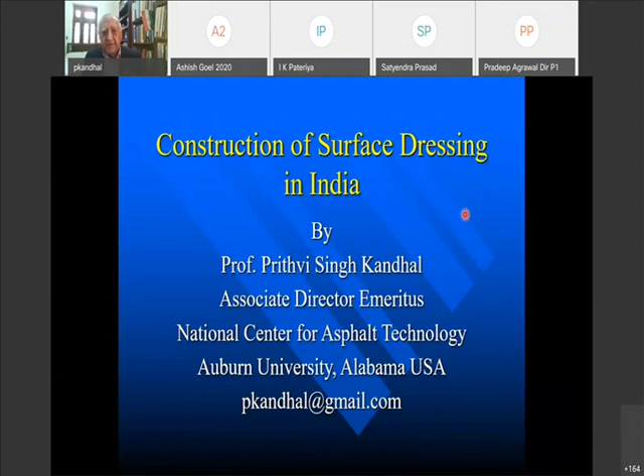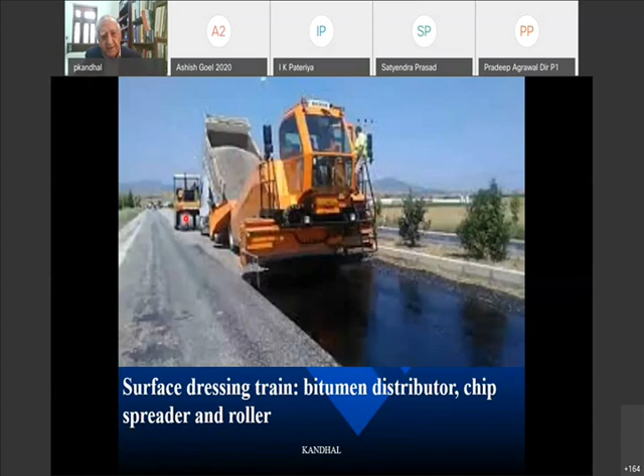Construction of surface dressing in India. I'll just give you some nuts and bolts of that. And here we have, again, a train. Bitumen is being spread, stone chips are being spread, and there's a roller behind it. So it's like a train which goes very fast.

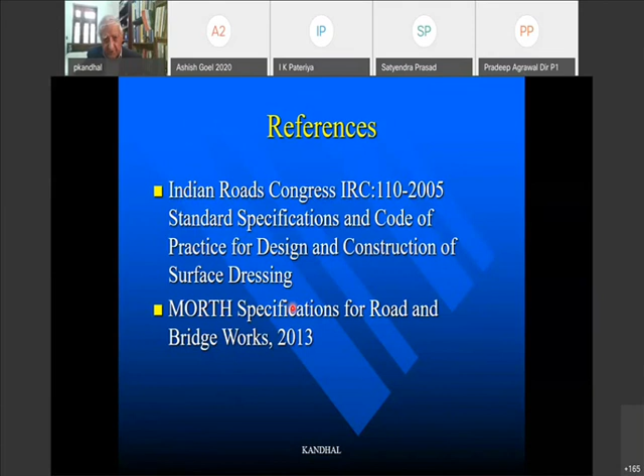So as I mentioned before, the Indian Roads Congress has the code IRC 110, adopted in 2005, I think revised in 2005, Code of Practice for Design and Construction of Surface Dressing. It's a very excellent code, which an average civil engineer can understand. Then we also have the Ministry of Road Transport specification on surface dressing in the book year 2013. So I'll just take you through how we use the mechanized surface dressing. And I should mention at this point in time that all my slides don't have any copyright.

I'll send you a copy of all the slides I'm showing to you. Feel free to use them. That's the way we can spread the word. That's the way we can train people in that.

So let's talk about the materials first. I'll talk about the binder and then the aggregate. So the binder types, we have two types. We can use paving bitumen VG10, viscosity VG10, which is equivalent to our old 80 by 100. Or we can use a rapid setting cationic emulsion. I would prefer that because it's a cold technology. So I think we should use more of this one, although both are allowed in our specification.

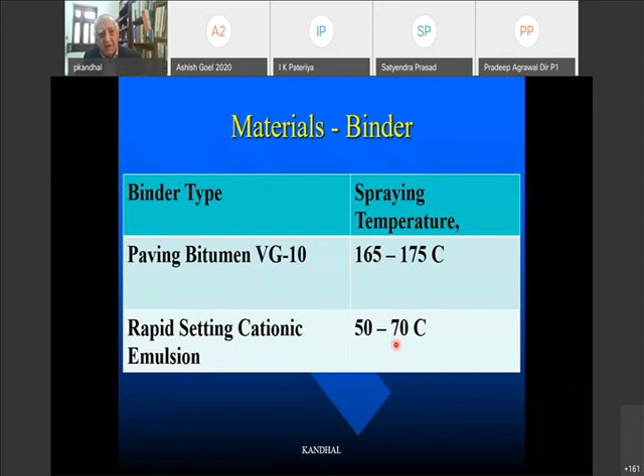And here are the spraying temperatures. For paving bitumen, we have to heat it to this high temperature. Whereas for emulsion, we have to just warm it to 50 to 70 degrees Celsius. So here is the binder, and now here we have the aggregate.

These are the two most commonly used sizes. We have 13 millimeter and 10 millimeter. There are 19 millimeter and 6 millimeter as well in our standard. But I'm discussing only these two because these are very, very common. This one is passing 13.2, retained on 9.5 millimeters. So it's essentially one size. This is passing 9.5, retained on 6.3, again, one size stone. So that's the aggregate we have to use.

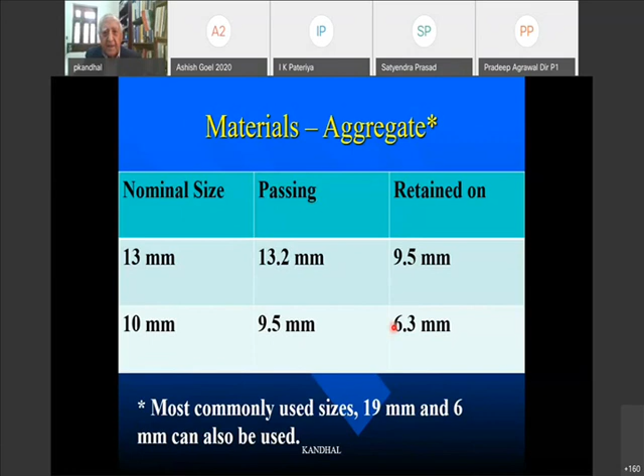We have to order those. If we have to use pre-coated aggregate, which I'm advocating right now, we must go to 100% pre-coated aggregate. That's my recommendation. In that, we will use 0.75 to 1% VG10 by weight of aggregate to pre-coat the aggregate uniformly. And the pre-coating will be done in an approved hot mix plant. After we pre-coat the aggregate and we stockpile it, we have to cure it for at least 1 week.

Just when it comes out of the hot mix plant, it's always free flowing. We have to make it free flowing so that the chip spreader can spread it. But if you cure it for 1 week, it makes it more free flowing. And it should be free flowing, not sticky. If it is sticking, then it won't work at all. But with this kind of bitumen content, usually there's no problem. It's free flowing.

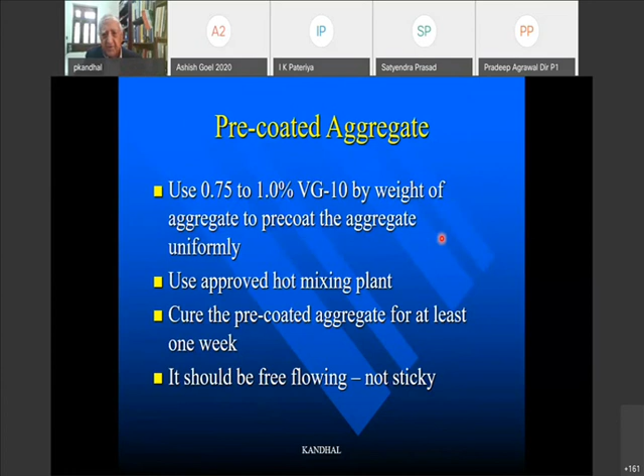Now weather. If we are using a VG10, then the minimum air temperature is 16 degrees Celsius, and the surface condition should be dry, because for hard bitumen we need a dry surface. With the emulsion, we can get by with 10 degrees Celsius minimum air temperature. So we can do it in quite many months in a year. And the surface can be either dry or damp, doesn't matter. If it's damp, it's okay because emulsion already has some 1/3 water in it. So damp will be fine.

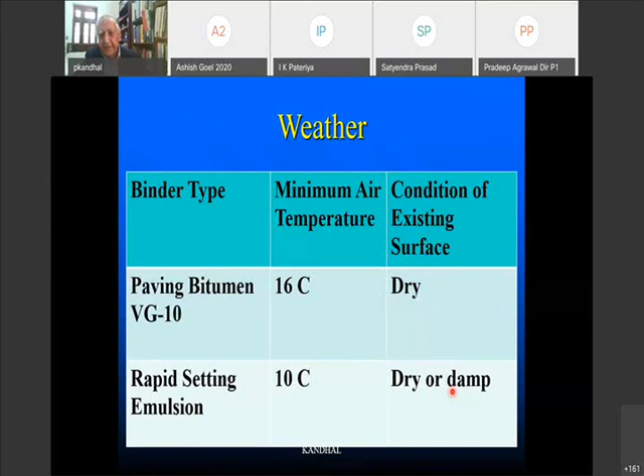I'm just giving you some highlights of that IRC 110. It's all in there, but I'm just taking some main points from there, which I think we can promote to implement the surface dressing. Preparation of base, whether it's a WBM or WMM, water-bound macadam or wet mix macadam. Remove depressions by adding new material, because surface dressing is not going to take care of the depressions. Even the premix carpet cannot take care of most of the depressions.

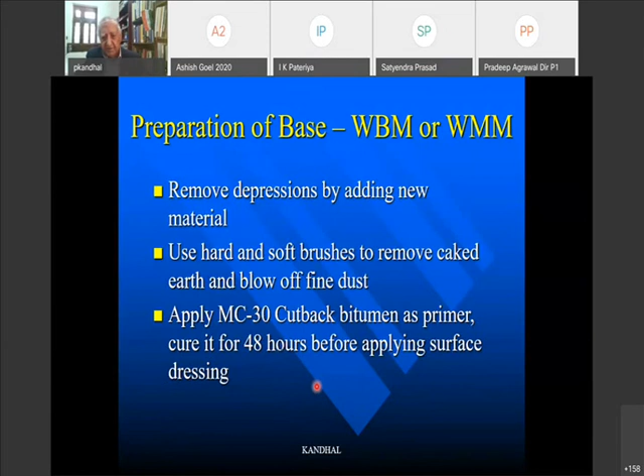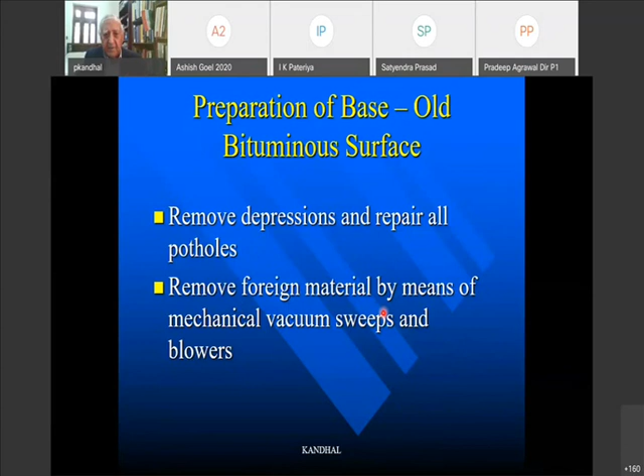If we are talking about the old bituminous surface, which might be old PMC or old surface dressing or whatever, still we have to remove the depressions and repair all potholes, and remove foreign material by means of mechanical vacuum sweeps and blowers. Then we apply the bituminous binder, applying heated binder at the specified rate using a mechanized bitumen distributor fitted with spray bars with nozzles.

It's available all across India because we are using it for prime coat and tack coat and sometimes stabilization. Pre-calibrate the spray system to obtain the desired rate. Before we bring this bitumen distributor on the job, it should be pre-calibrated off the site to make sure that it applies the amount of binder as we want. Use a building paper of sufficient length to obtain the desired rate at the starting point. All this is explained in IRC SP 110.

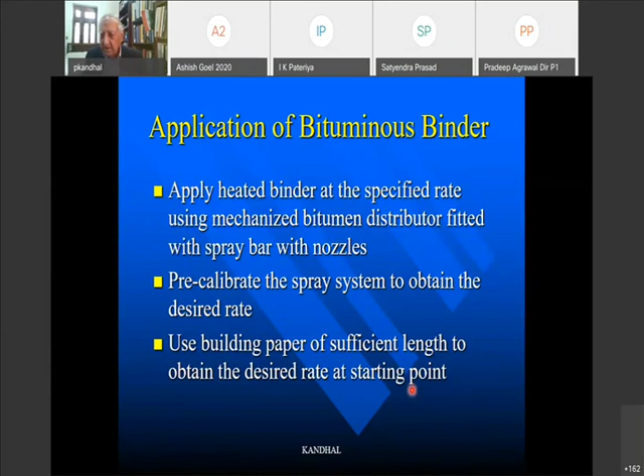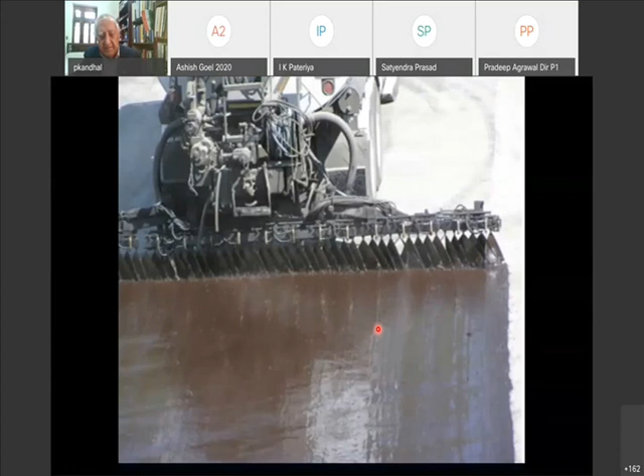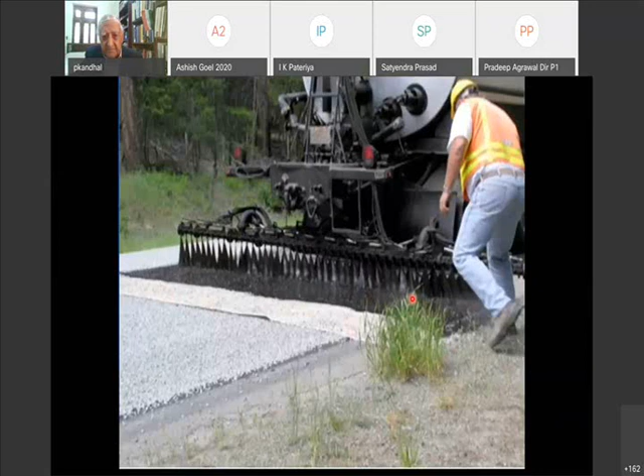So again, another example of a bitumen distributor. Now here you can see the building paper. This is the building paper. We are starting the operation on the building paper, building from here to that side, so we don't have too much binder buildup, and by the time it reaches the end of the building paper on that side, we get the desired rate.

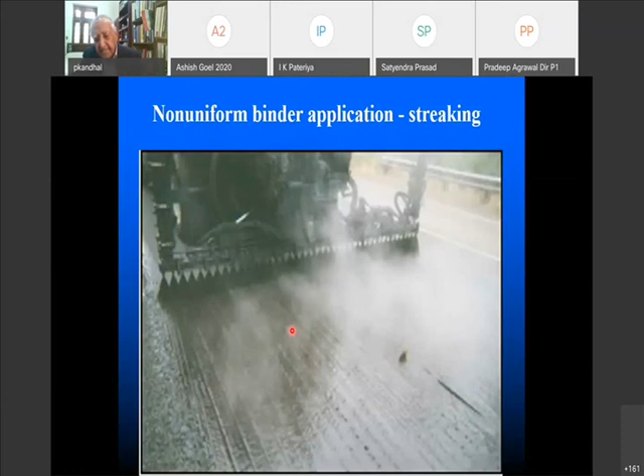Again, we have a case of a bitumen distributor applying bitumen. Now, this is a case of non-uniform binder application. You can see the streaking here. Some of the nozzles might be clogged, so we don't get uniform coverage here. You can see some space in between. So we have to make sure that all the nozzles are working and the equipment has been calibrated.

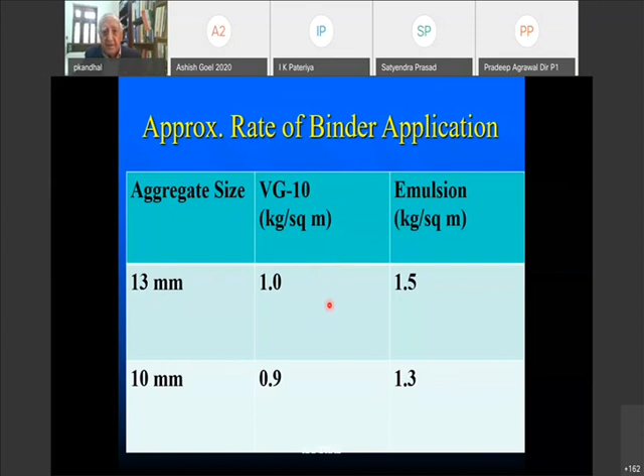Now we apply the aggregate. We already talked about the binder, how much to apply and what kind of binder to use. Now we apply aggregate using a mechanized chip spreader. Again, I'm repeating all these things for the people who are still not convinced that mechanized equipment is available in India, available from Gujarat. As soon as the binder is sprayed, calibrate the chip spreader to obtain the desired application. Before you bring the chip spreader on the job, off the site, make sure that it applies the right amount of chips to the binder. Aggregates should be clean and pre-coated with bitumen if specified. And again, I'm saying let's go with 100% pre-coating, so that dust won't be any problem.

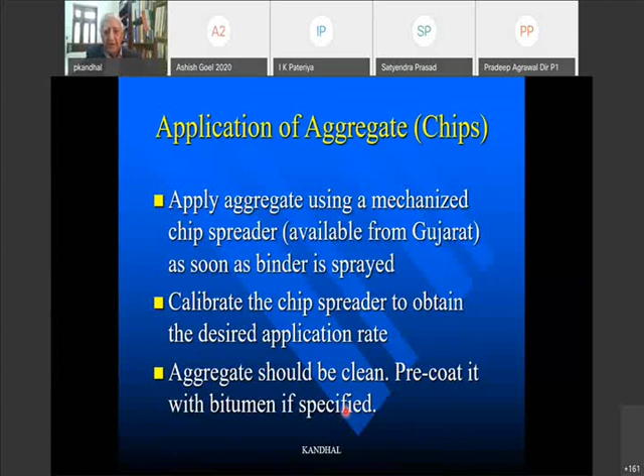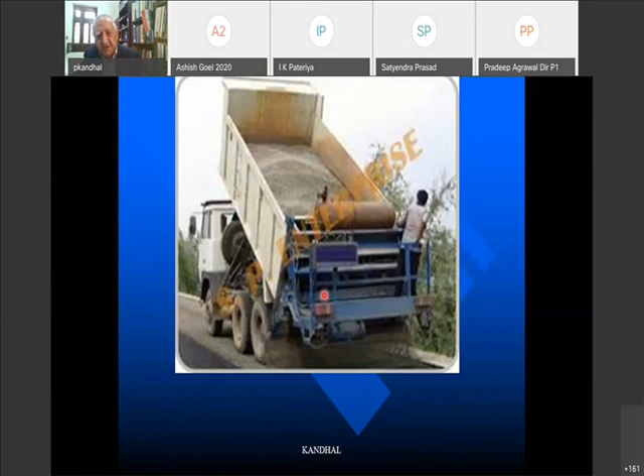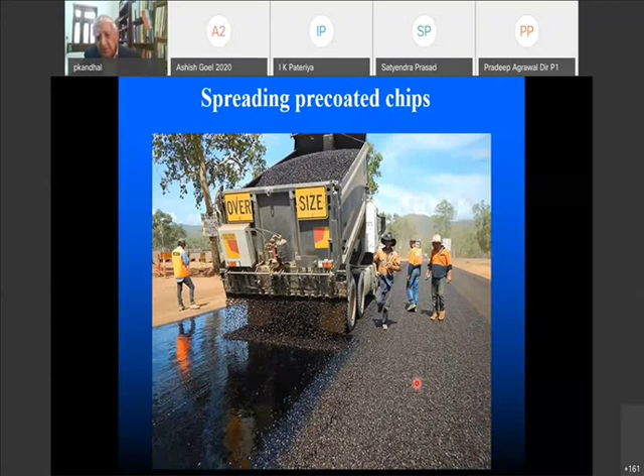And here you can see a mechanized chip spreader, again mounted on a typical truck. This is in action, and again, this one is in a foreign country. Pre-coated chips are being spread. And the aggregate surface looks blackish, so the public won't complain if perception is the problem.

Then the application rate of aggregate. Again, just use these which I'm giving you. If you use a 13 millimeter aggregate size, the application rate in cubic meter per square meter is 0.009 to 0.011. Maybe you start in the middle and see whether it's okay or not. If I get excess aggregate, then I lower it. If I get deficient aggregate, I increase it. It's like art; you have to perfect it on the job. If you have 10 millimeter size, then the rate is lower, obviously. So these are the starting points, and that's what we want to teach them.

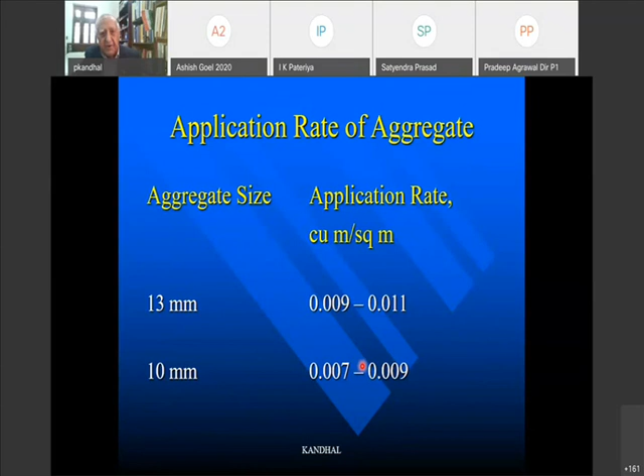We don't want to confuse them with too many factors at this point in time. Rolling immediately after the aggregate is spread, roll the surface with pneumatic tire roller. Roll with a tandem steel wheel roller only if pneumatic tire roller is not available. Do not roll excessively. If you roll too much, you will just break the stone.

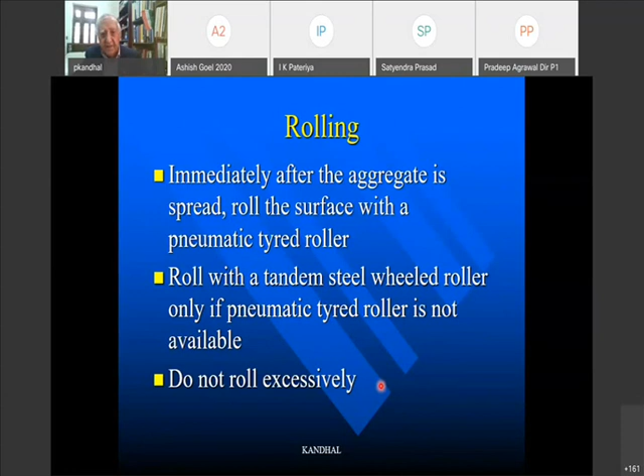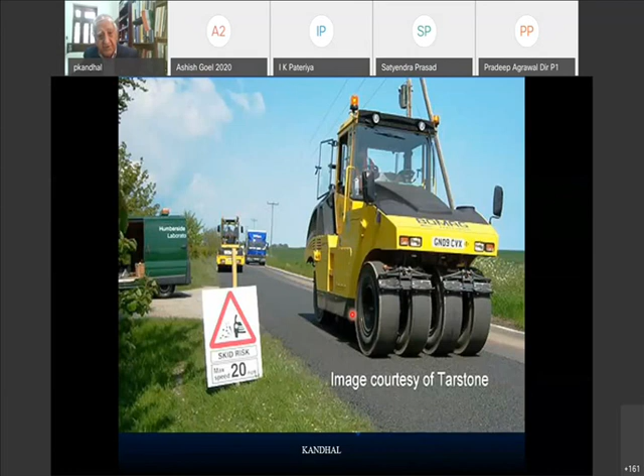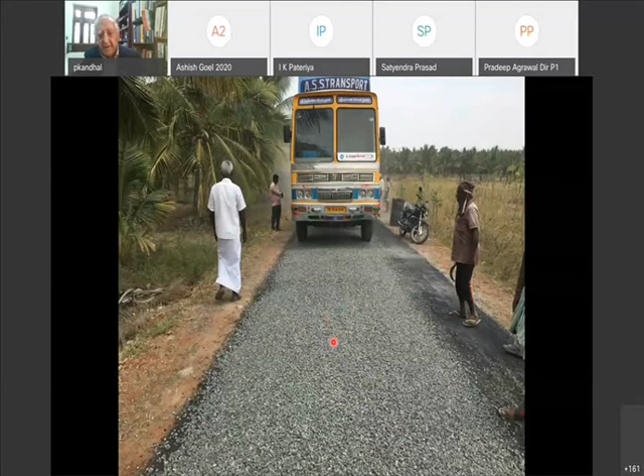And that's not desirable. So here we have a pneumatic tire roller in a foreign country, and we have this kind of roller available in India. We are using it on a regular hot mix construction. And again, in South India, I think somewhere in South India, surface dressing is done without pre-coated chips. And again, a view of the surface dressing.

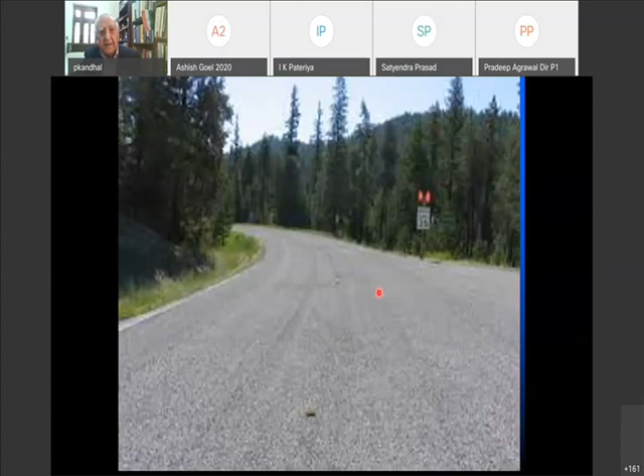And here is a road completed with surface dressing, a village road. And 2 or 3 more slides, and then I'll be done. If I am going to use a second coat of surface dressing, if double surface dressing is desired, then the second coat should be applied after the first coat has been used by traffic for 2 to 3 weeks.

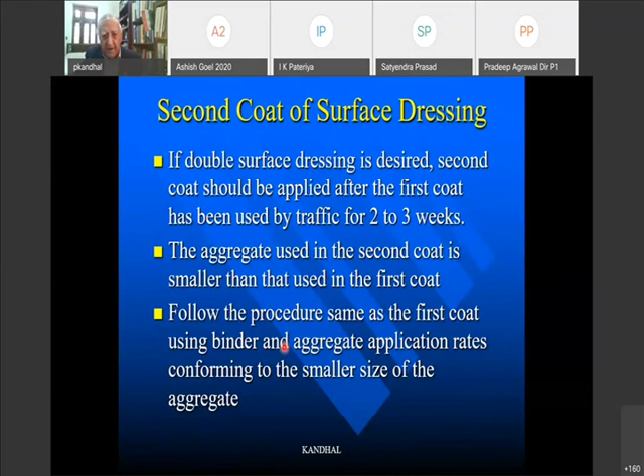And now that's a must, because the aggregate has been already laid flat by the roller, but we still need some traffic action to knead it and make it very, very stable. If the aggregate is not stable, then the second coat won't stick to the first coat. The aggregate used in the second coat is smaller than that used in the first coat, so that the smaller size can fit into the voids of the bigger size, partially fit into that.

Follow the procedure same as the first coat, using binder and aggregate application rates conforming to the smaller size of the aggregate. Opening to traffic. If possible, open the road to traffic on the following day. Now that may not be possible in most cases. If it's not possible, then speed of the traffic should be limited to 20 km per hour till the following day. Aggregate may get dislodged under fast moving traffic. If we have cars going very fast, not only the windshield might get damaged, we might dislodge even the aggregate which is already stuck in the binder. So excess aggregate should be swept off before opening to traffic.

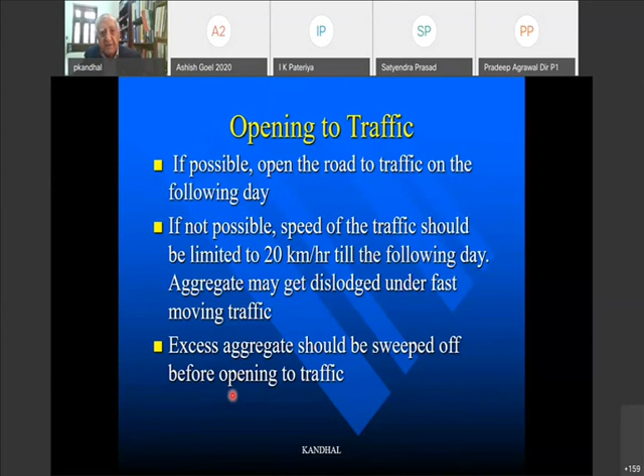Dr. Pateriya, on to you. Thank you, sir. Thank you very much for a wonderful presentation on mechanized surface dressing, showing us the glimpses of application in India as well as in some other countries. So, sir, with this, I'll now request our DG sir to make his comments on today's webinar.

Thank you. I want to thank all the participants from all the states that have participated in this webinar. Many chief engineers, and I can see some CEOs of SRRDA, they have participated. Professor Veera Raghavan is there, and Professor Guru Vittal is there. So I thank all of them for their valuable time.

And what Professor Kandhal has made us aware of, it's a huge opportunity for us to transform the road construction sector, and let us take the points forwarded by Professor Kandhal very seriously, do a lot of research. I think NRIDA should also put in a lot of emphasis here and commission studies which we can then adopt under Indian conditions. So there is a lot to be studied about surface dressing so as to instill more confidence here.